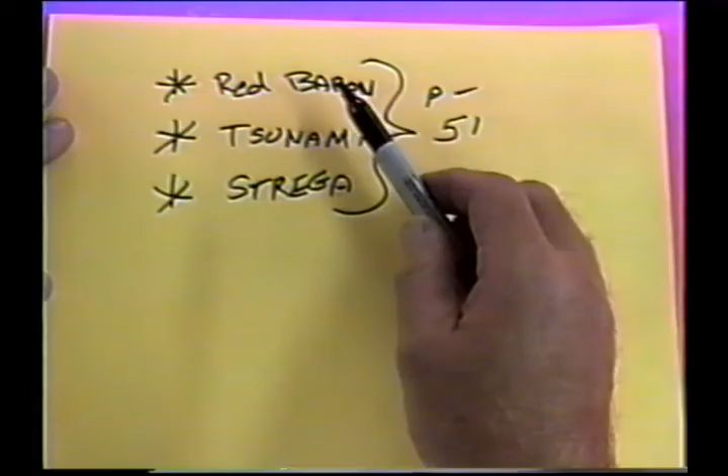All of these are in some way loosely based, very loosely in fact, on a P-51. That overall look of a P-51 is something that appeals to a lot of people. They've had various amounts of semi-scaleism. In the case of the Red Baron, it had the cuff in the wing, Tsunami had the scoops, Strega had basically just the paintwork. But from this whole group of airplanes now, we want to take this to the next level, and I want to go about this in a very methodical way.

Now, one of the things I want to try to do this year, and again, these plans change from second to second. The way this originally evolved, Joe and I together, Joe Adamisin, of course, had built the whole series of Spitfire planes, a total of 5 planes, each one a unique entity.

And what Joe originally started out with, we had started out with the idea in mind of making an almost semi-scale P-51, very similar to Al Rabe's planes, with dihedral, just roughly make this, and the large landing gear, the semi-scale, all the little things that go along with the semi-scale program.

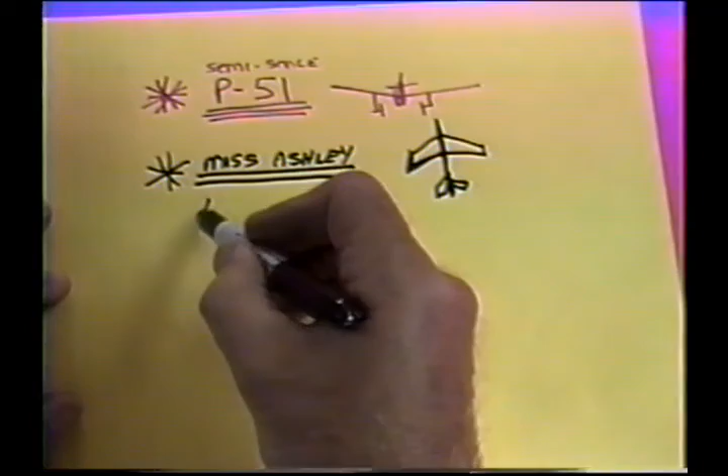Now that evolved into, from Joe doing research, because you'll hear this over and over on the video, Miss Ashley. Miss Ashley is a swept wing variant of the P-51. It's got a P-51 type body and Learjet wings. It's called a Lear Stang.

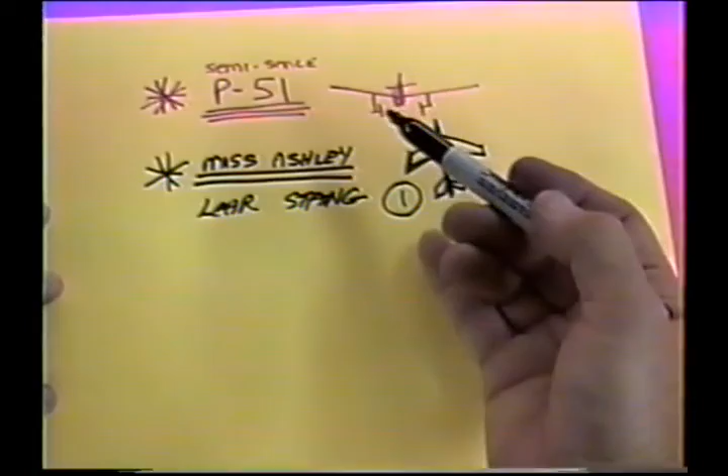It's a one-of-a-kind airplane. It's not a production airplane. Now, unfortunately, our plan had changed from the relatively scale P-51 to a Miss Ashley variant.

And I wasn't sure about a lot of things, the dihedral, the control systems, how we were going to, if we were going to use a tuned pipe on a P-51, it would be difficult if it was very scale, and would I be able to put it above the wing? There was a lot of question marks at the end of each one of our discussions.

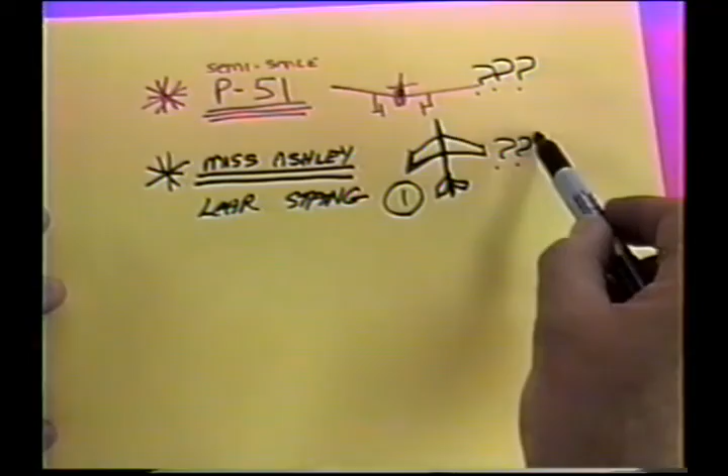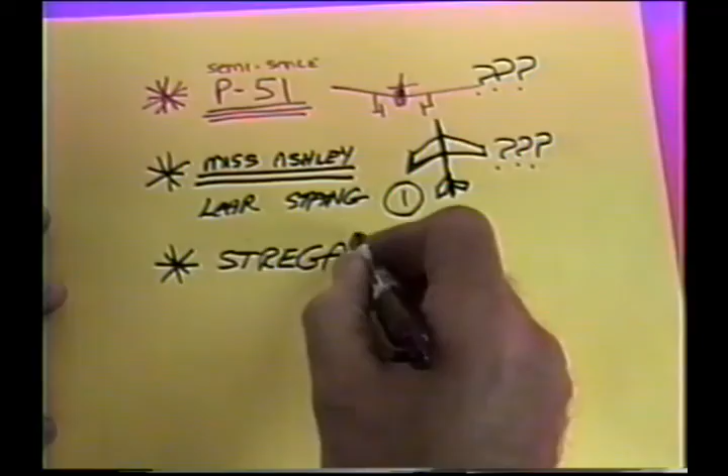And so this project sat in limbo a big part of the summer. And then what happened is, I had gone to the team trials with Strega. And I had been doing a lot of test flying with the GMA 50, GMA 60.

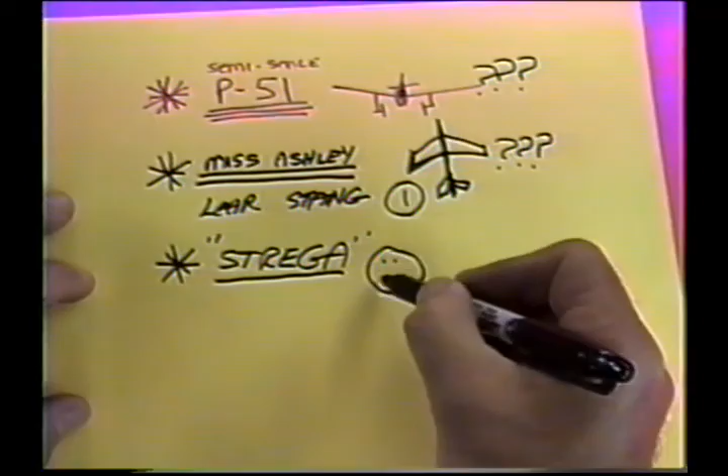And what I wanted to do is, at the end of the season, this plane was really getting tired. This poor Strega, I hate to even say it, he was really turning into a beat-up warhorse. And so what I decided to do is, at the end of the season, before I went into one of these very complex planes, what I wanted to do is make a replacement.

A plane that was basically similar to Strega, but had a little bit more of the P-51 flavor.

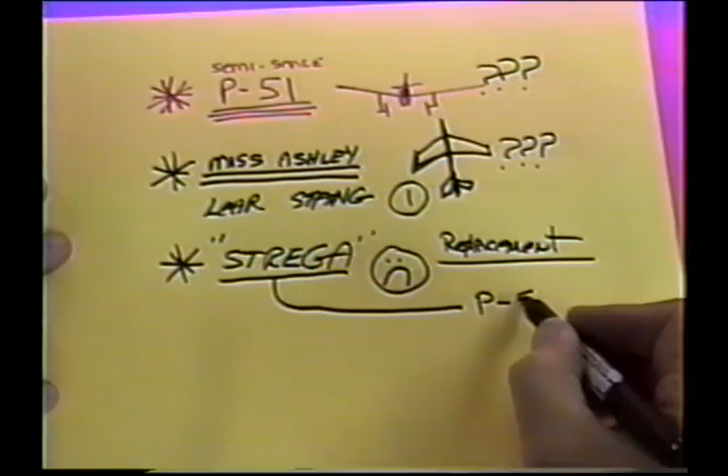Now at this time, Kent Tyser had come up with some really nice drawings. And see, we really have a lot of accessory items here that we can put in. I'm just going to rough this out.

On a more scale-like Strega, one of the things that, if it's a traditional stunt ship, and again, we're going to start out with this premise, we have a real nice canopy mold that Dan Banjock did the carving on, so we have that piece of the puzzle that we didn't have at the time we built Strega, if we decide to go in that direction.

We also have a lot of airfoil technology now that Joe has turned up, in contact with Al Rabe, doing some Rabe airfoils. We have a complete set of Rabe airfoils. So what I wanted to do this year is re-engineer the wing using a Rabe airfoil as my first order of business, and that's going to be the first part of this project.

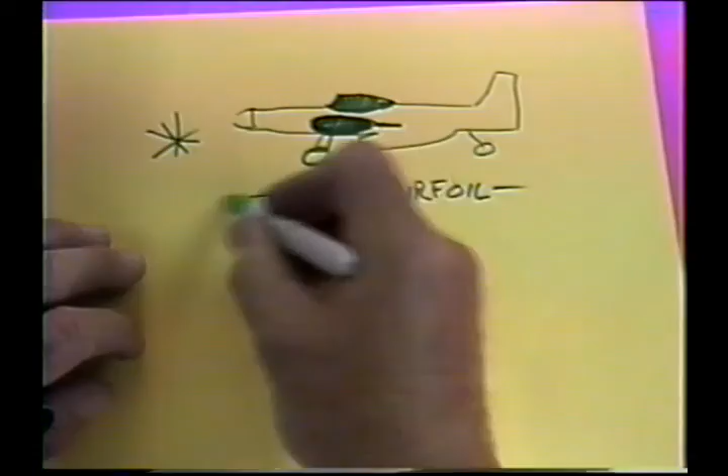Joe Adamisin did just an incredible amount of research into this. He had people at Boeing checking it out, a friend or two helping him with this. But basically the two big changes that this preliminary plane will have are the Rabe airfoil and the fact that we have other choices of canopies.

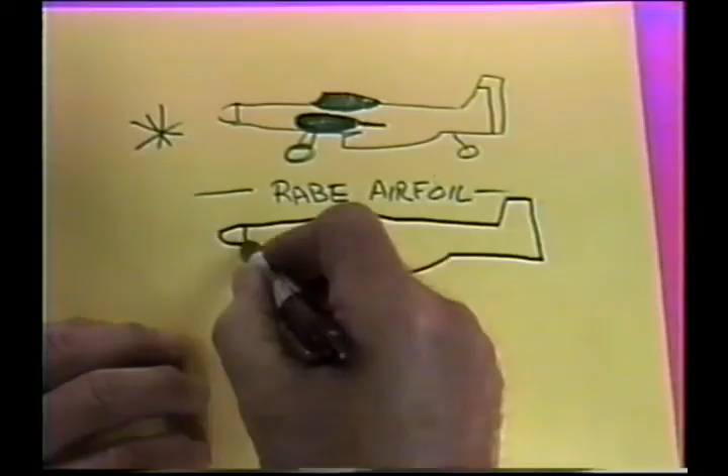Now, picture how this evolved. I wanted to make a carbon fiber body too. So rather than make two wings, one of the things I thought I could do is, if I make a replaceable wing similar to Paul Walker, or similar to seeing how successful Casminato's carbon wing was, it really got me going on this.

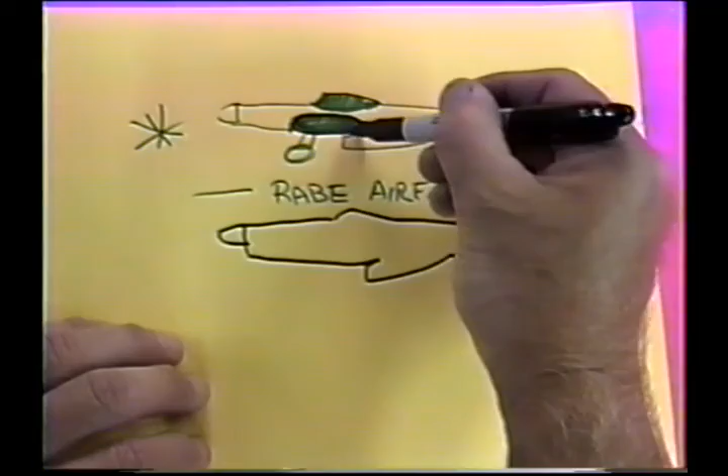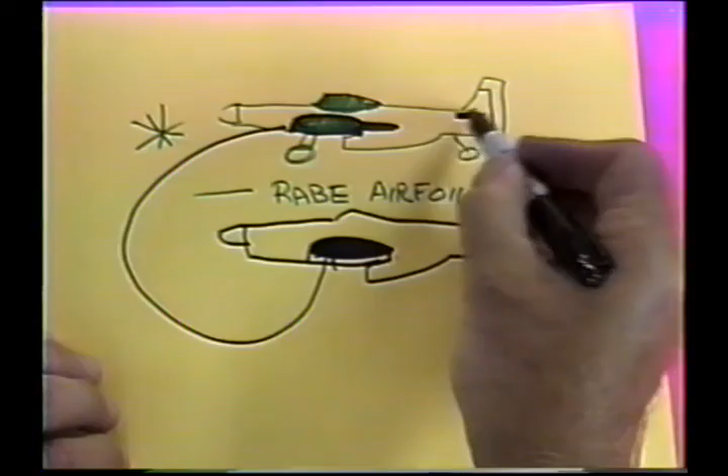If I made a replacement wing, I could possibly - and again the plans for this may change, but this is how we started off this project - we can build one wing, one tail possibly even, or maybe two. And by switching fuselages right at the field, we then can tell...

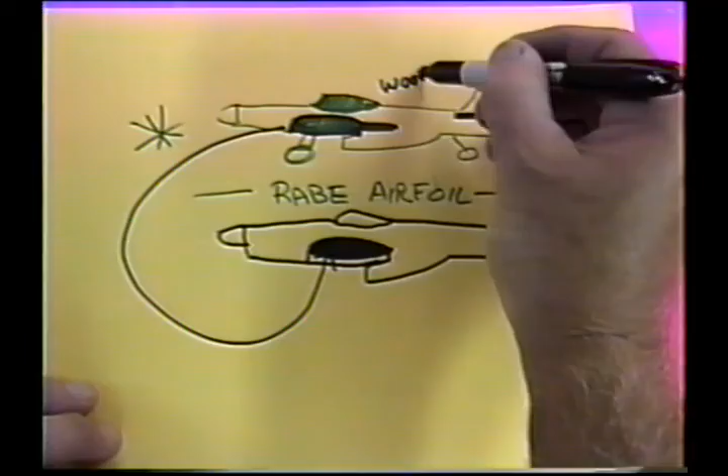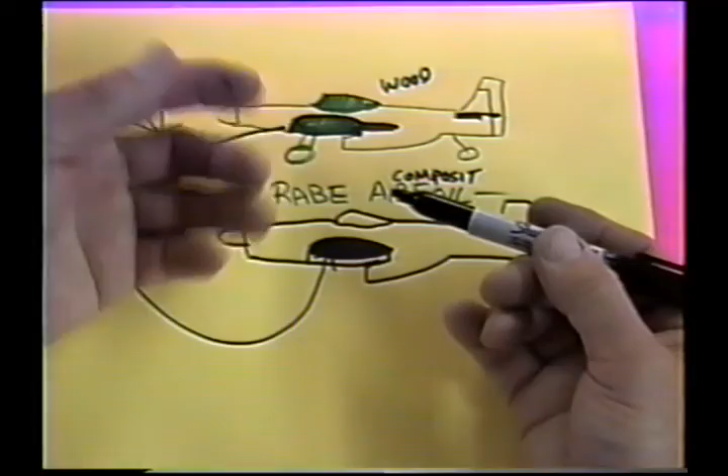Now the reason I think this would be a realistic way of doing it is, looking back at Strega, the reason I need a replacement - the wing and tail are still fine, but the body, the fuselage, the cowling is all deteriorated up here. Everywhere the pipe tunnel is, it's all deteriorated. The wood is so oil soaked you can't even put composite over the top of it. The body is cracked back here.

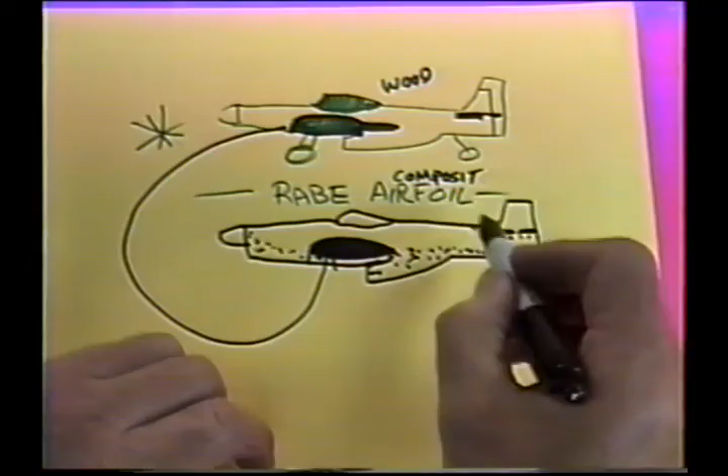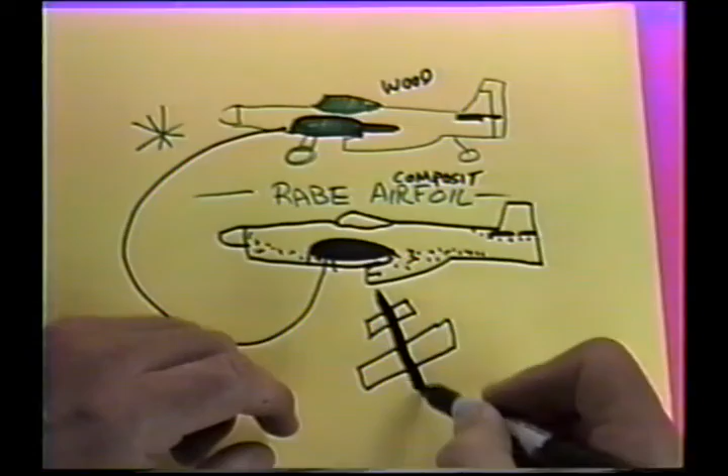It's basically what I'd like to be able to do is take the wing and the tail out of Strega and go mold up another body or build another body. And by the way, this is how I'm sure other people, like Paul Walker, people that make take-apart planes, do it - one of the advantages is when you go to build a new plane, you don't have to build a whole plane.

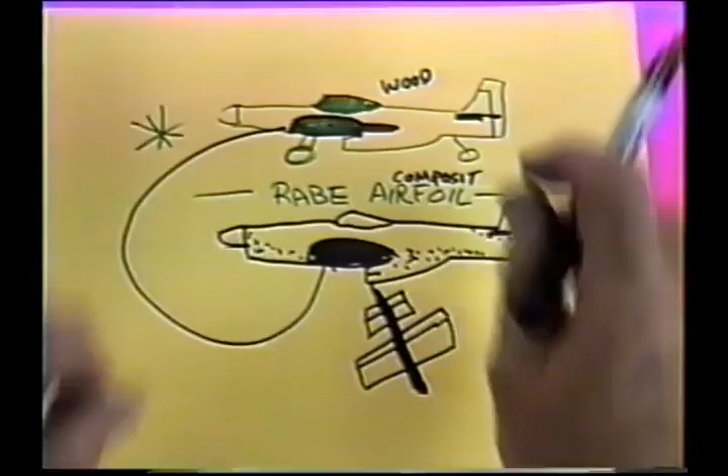So we're going to try to make part of this project - we're going to begin with the premise that hopefully we can make a replacement wing with a Rabe airfoil and two fuselage assemblies that'll fit the same plane. They'll have a P-51 flavor and be relatively - well, let's put it this way - straight wing, no dihedral, no real intricate paintwork. This will be our bread and butter plane.

But then once that original plane is completed, and it'll have two fuselages - once this part of the project is completed, assuming (and I'm getting a little carried away here, but you have to be a little carried away to do this kind of research work) that the carbon fiber body is not in some way undoable - and I cannot picture right now that it's undoable, it just may be very expensive and very time consuming - then I feel that this opens the door.

You got to picture this. This opens the door to the final project, and I would assume this is going to be sometime after Christmas, that if we arrive at this, doing a relatively full-scale Mustang type of fuselage with kind of an Al-Rabe dihedral deal.

Now, this is a real important part of why I think this is a good choice. Let me go through this before we actually start cutting wood. On a standard stunt ship, what happens is the body, even the body sides, and you include the top block - what happens when you make the cutaway for the wing, here's what really happens.

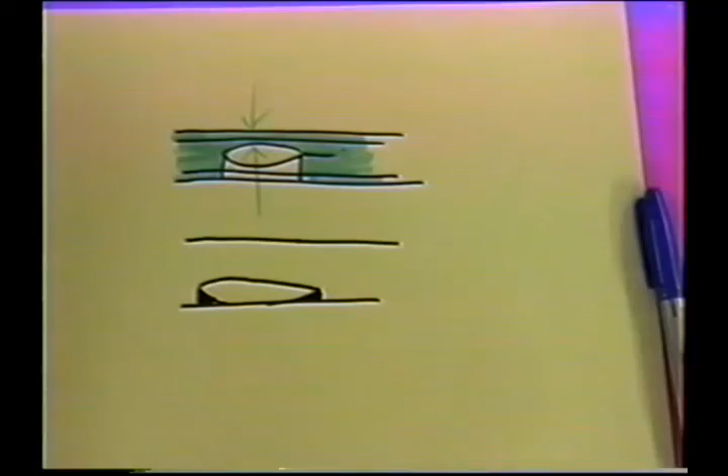On a relatively scale Mustang, what's different? The wing is sticking out the bottom of the body, so you only have to deal with this little piece here. Now look at the difference - the total amount of structure, and of course the canopy - but you have all this structure in a low-mounted plane, a low-wing plane.

So if the carbon works out for us in the very beginning, this would have a dihedral angle in it. And by the way, we're hoping Al Rabe is going to join us, at least in spirit, on this project with some of his expertise and inventive ability.

But what happens is you have a much thicker part that makes a take-apart plane more practical. Now, if the carbon fiber fuselage works out well, then this can be a mold, and I will spend an extreme amount of time and energy to make this the best possible mold it can be for a full semi-scale ship with dihedral, the large landing gear, a molded carbon fiber body, maybe make our own four-bladed props. Again, more coming up on that. But it's going to be step by step, and the reason I spent this couple of minutes to explain this is the logic so far of what we're trying to do.

A reason is engines. Years ago, engines were less powerful. But the other thing is they had more inherent vibration. Now, modern engines, the whole slew of them, you can pick any one you want, run at a relatively higher RPM, have less vibration, and make more power.

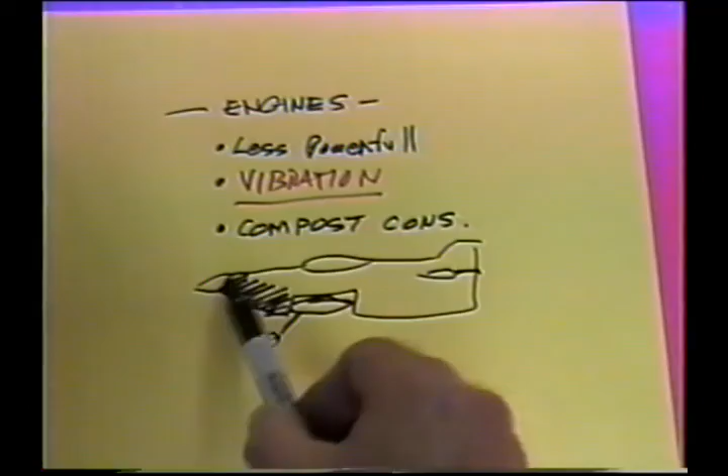So one of the possibilities I'm hoping is with the composite construction, I might ultimately, and of course this can all change, be able to supply a shell where a person, all they would have to do is build a wing and a tail. In its worst case, this whole part could already be molded in one piece or in halves.

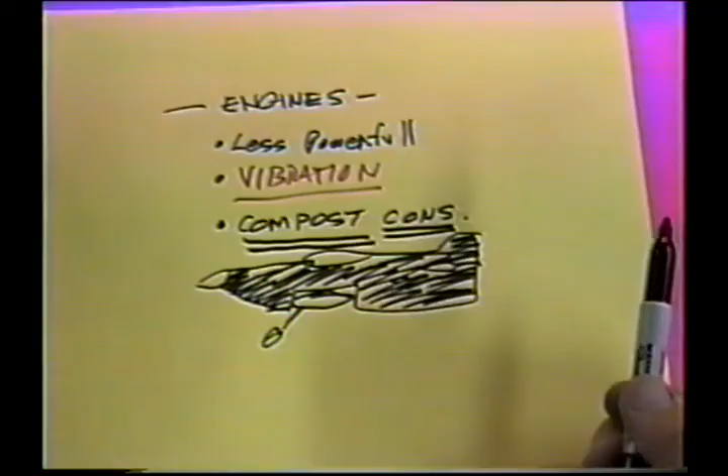And what it would allow us to do is, let's say Joe Adamisin wants to build the same plane, we can make him a fuselage and mold it up in a relatively short time. Let's say Al Rabe wants to make one of these, or let's say anybody does. Gerald Champ has shown an interest in this project. Gerald Champ sent me that P-51 that's almost completely built except for the wing, and we could use that as a basis or a plug for making the actual mold.

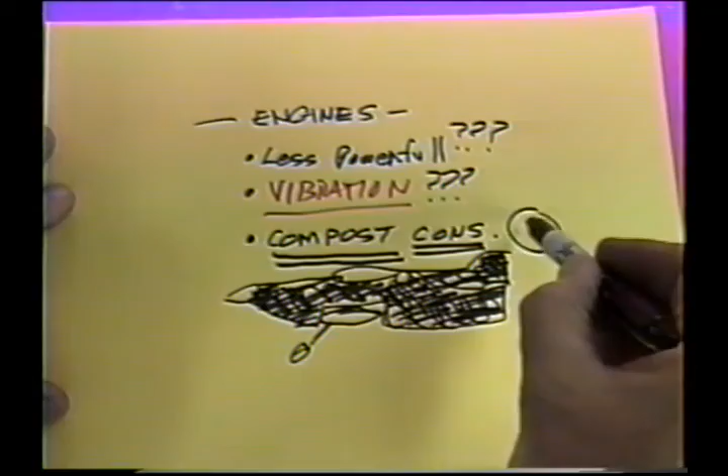But one of the things that makes this possible, years ago I don't know if the vibration and power levels would have lended themselves to composite construction. But given the fact that we've got so much time on Strega with the Jett, and the PA is relatively similar in vibration and power output, it gives me a lot of confidence that this can evolve into a very interesting winter of building.

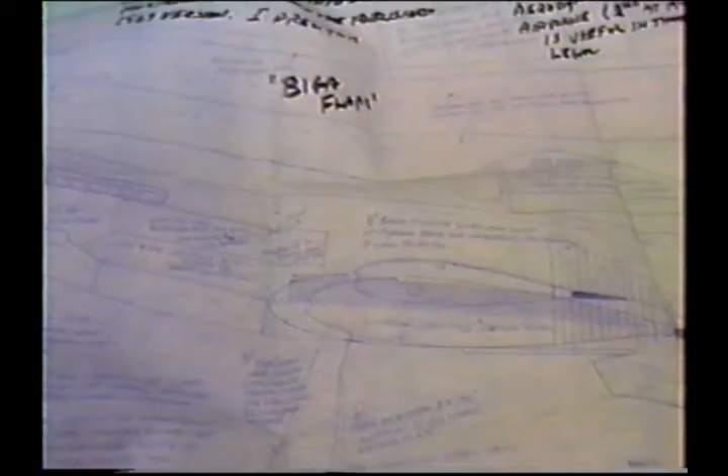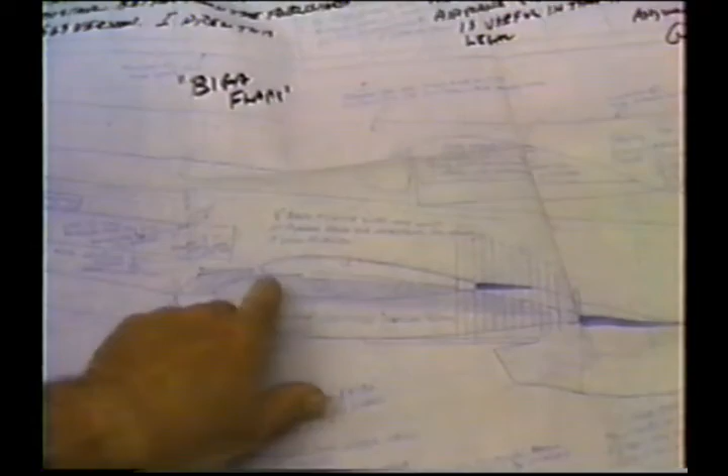Anyway, as always, the first part of this - these are Al Rabe's original plans. First part of anything, since we're going to be making a straight line plane, we need to get - and Joe Adamisin has already sent them here - enlarged versions of this, 8.5 and 11 inches, so we can lay out our straight line wing using Al Rabe's original airfoil and flap shapes.

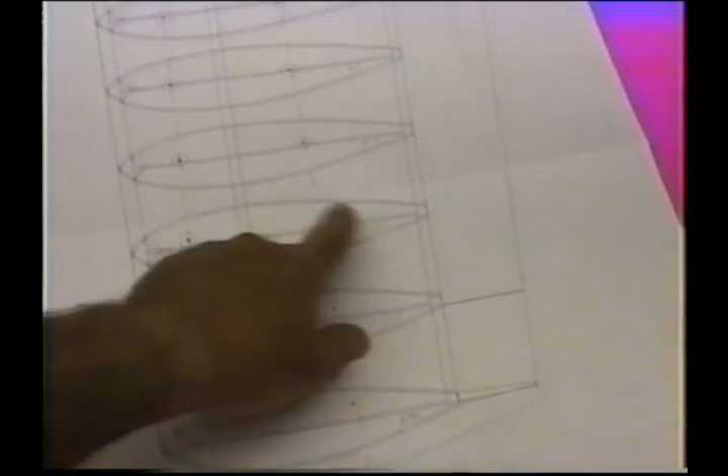Of course, Joe's got this laid out in complete scale. This is for the dihedral wing. We're going to be making a straight line wing, but we're going to use this. You can see how much different this is, say, than a Paul Walker or a Cardinal or an SV11. It's a radically, in my book anyway, radically different airfoil.

Right from the very beginning of this tape, I'm going to make all new templates. I'll be more than happy to loan those templates to anybody, but we're going to try to use those same templates over and over again for as many people as are going to be joining us in this project.

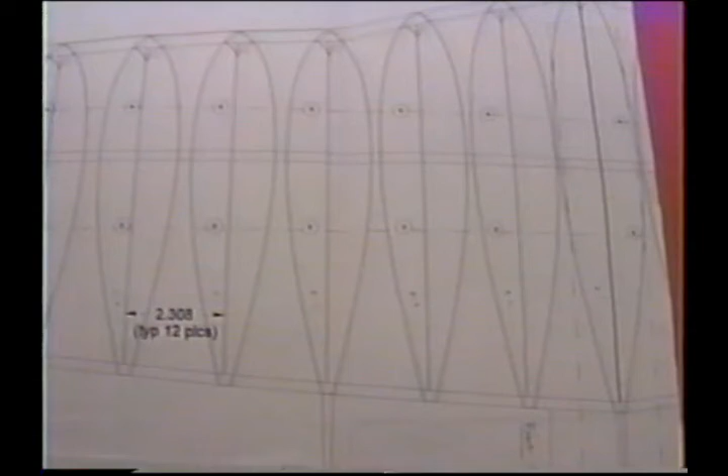Now we're going to begin the actual construction of the first plane of this season with making up the wing ribs. Off camera, about a week ago, we had an afternoon where we weren't too busy, and I wound up starting making the templates. That's on tape 176, but I didn't get very far because various other things were happening around here. But I want to continue and pick up from this point on.

We wound up just roughing out the first half of the templates, and I have to pick it up from this point on. If you're going to go back and follow this whole thing, you need tape 176 also, but we're going to start with the templates, pick it up from this point, and start cutting. We may even get a set of ribs cut today, I don't know.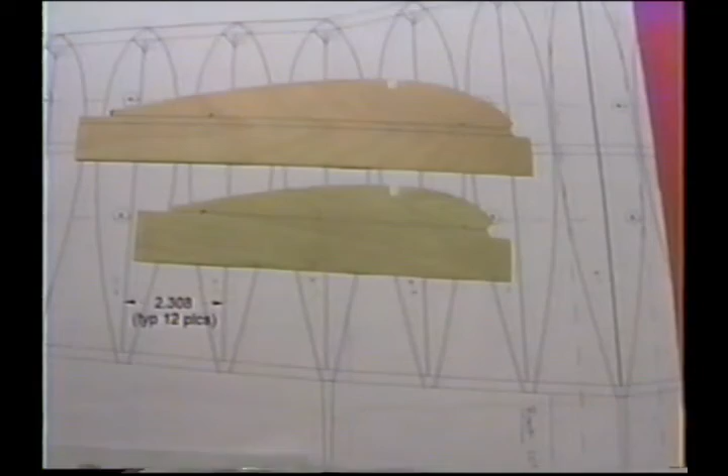I want to give you an idea of the change we're actually making to the airfoil. Not very significant, but it's an amount worth taking into account. So if you're building along with us, you're going to want a set of the new ribs, the new templates, and the new plans. For right now, what we want to do is finish the work needed to get these templates ready to carve a set of ribs, and we may get that done in this session.

This is a way that's been developed, I think, by Joe Adamusco. We've cut up some pieces of threaded rod, and we made a little tool off camera on tape 176 for making up the notches. If you've never made a set of ribs for an original plane of your own design, or anything really, this would be an interesting exercise for you.

For our original set of ribs, I'm not going to be too fussy about the wood quality. I'm just going to go to the rack and pick out some pieces of wood, sandwich in 15 pieces of wood here, rough cut them out, because that original set is going to be strictly a set of templates. In other words, the original set we're making, we're not going to use as a set of ribs. We're just going to use it as a set of templates for tracing out the ribs.

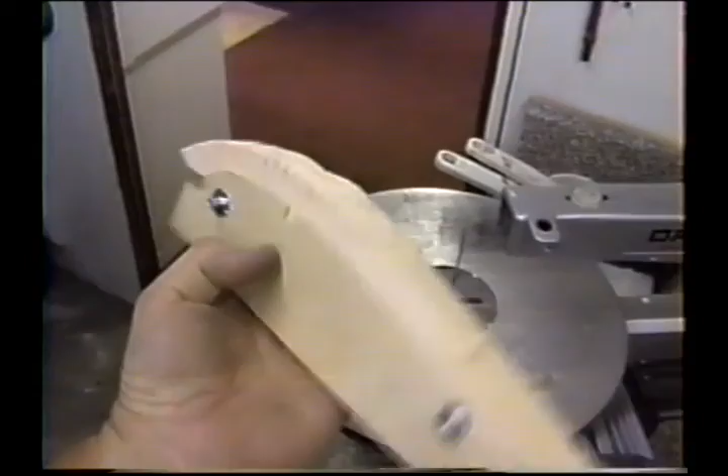Okay, today I guess we'll finish carving the ribs. That's one thing we can do.

Well, what happens, and I guess it happens to all modelers, is you get into these gaps where at some points in the year I have gaps of 3, 4 hours at the end of the day to work, or gaps in the morning, the afternoon, or whatever. Right now I have small gaps, so I always try to plan one step at a time rather than trying to plan a giant project, or laying out something, or making some decision.

I try to each day plan one small little project. Now if I can finish doing all the carving and sanding and truing up of the ribs today, that'll be a nice thing. I can trace these out on a piece of mylar, that'll be another nice little step. There's several nice little steps instead of trying to take a big chunk and then you're kind of frustrated at the end of the day when you don't finish it. So today if we can finish these, that'll be one nice step in the bank here.

These came out pretty nice, by the way. Pretty good. Now looking at this, basically I just want to repeat what I did yesterday, do it in small amounts.

Again, it's real frustrating to me because obviously what I'd like to do is just work to midnight every night on this stuff, but what generally happens is I have to work in small chunks of time. If you plan out one job at a time, usually you can say, well, at least I got that accomplished today, now it's one step out of the way, or whatever. Anyway, that looks like how this is all panning out.

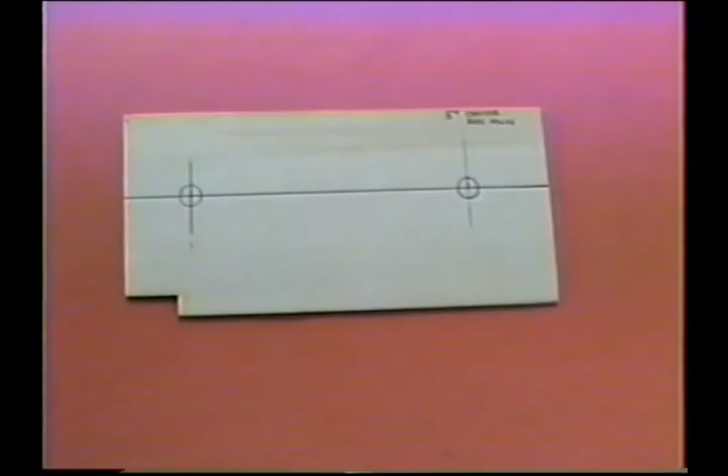I just want to drill it just a couple of thousandths thinner so I can get a real nice press fit on there when I push the tubing in.

I'm trying to make up a base plate, just ordinary 16th balsa, where this will confine the rib. When I shove the rib in, that'll keep my center line. I can then line up the center line, and my template will be glued.

I'm going to put some 1/16 braces on here to space it up. I'll be able to slide the rib in, and then it'll already have the holes in place, and cut it with a brass tube. So just making up a little fixture like this should hopefully be a good way to do this, and something that when somebody wants to borrow the ribs and the templates, this will already be in the little kit for them to use.

I took a piece of 3/8 tubing, sharpened it of course on the belt sander, put a little edge on it. Another trick for getting nice clean holes here is run a blade along the inside. Now keep in mind, this is a razor blade.

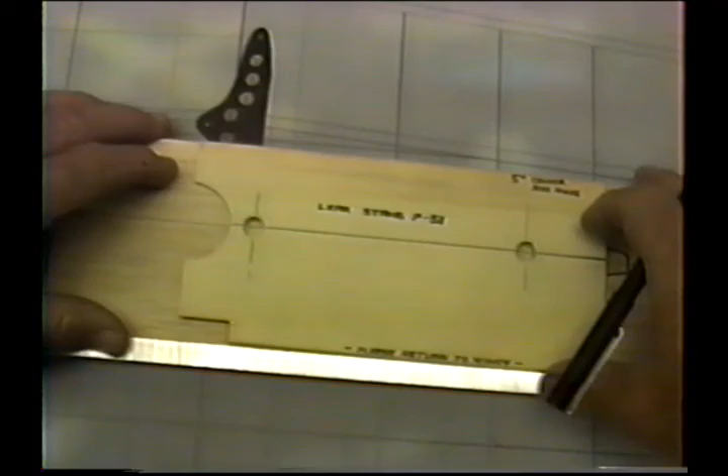Now yesterday what happened is, in the middle of working on these templates, I got interrupted with some customers here in the shop. What I need to do is, on these aluminum bars, I need to lay out two new holes. I was thinking I could possibly use one of these, but they're up kind of high. I want to lay these out and see if I have any real chance of getting them into two new holes. It's not really going to be possible. So instead what I'll do is I'll turn the bars upside down.

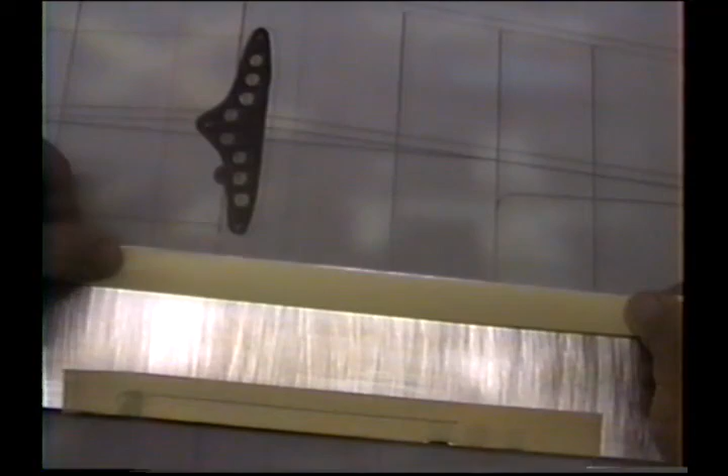The only reason I put the tape on there is I don't have any bluing. Bluing is a material like paint, like nail polish, that you put on aluminum so you can put accurate scratches. But we have it all down the shop, and obviously none of it's up here.

Well, what I want to do is get a relatively accurate set of holes. Again, I always use the little pens, I don't know if I've shown this before, these really fine point Pilot razor point pens that seem to work well for this. Same way I put center lines on. This is a good way to get your center lines figured out, and you can see it leaves a nice fine line on there.

What I'm looking for is that the two holes are 5 inches apart and parallel from the top of what will be the base of the jig. Just trying to get an accurate gauge here, because I want to have the back piece flat from the trailing edge. Obviously these pieces are oversized, but that doesn't really matter. This will just give me a rough.

Just a little double check that I'm not off by any amount. We'll go over to the drill press and drill these out. The way to make sure that the two holes are the same in both pieces of aluminum is I've clamped them together, laid them flat on the table, made sure this edge is parallel, and I'm going to spot, just put a small drill right on center, and then check it with my ruler and with my template to make sure I have this right on center before I go and drill out the big hole.

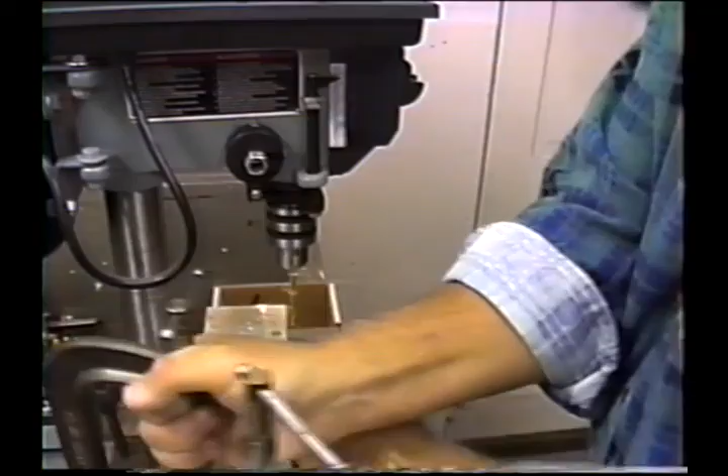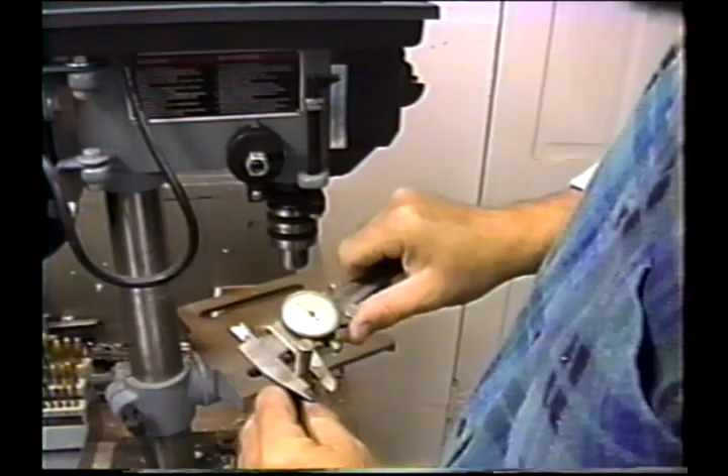It's good to have a nice set of drills. By the way, a set of these drills, I've seen these on sale for under $50 locally - usually they're about $70, $80. Having a whole set of number and letter drills is a good idea if you're doing any kind of serious modeling. Anyway, get one exactly the size of the rod plus about 2 thousandths. This way we'll hopefully get a real nice fit on the rods. What I'd like is to be able to press the rods in, but I don't want them slopping around and flopping around - I'd like it to just be a nice press fit on the rods.

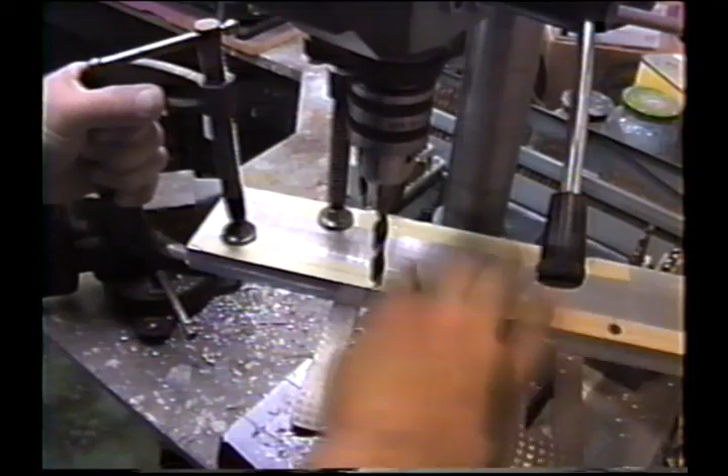By the way, another thing I've learned many times - if you're even new to drilling this kind of heavy material with big drills, if you're in doubt, you could always take an extra clamp and clamp this to the table. In this case, you can see I'm holding it with my hand. Never go on a piece like this and hold it with your fingertips, especially when you're drilling this thick of a material, as it tends to go through and it'll definitely bite.

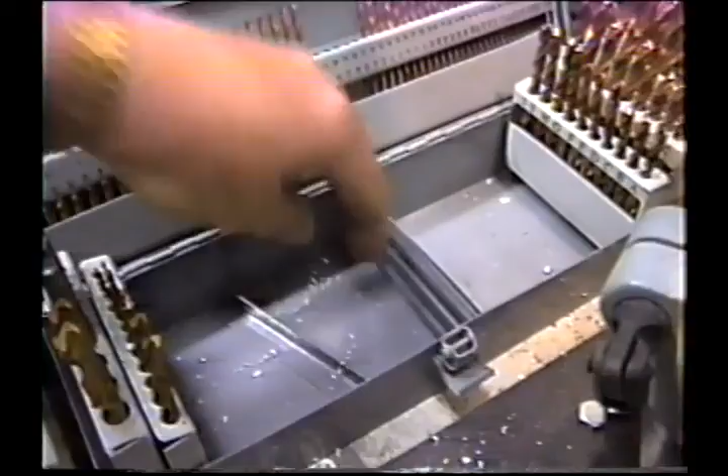A set of these drills is really a good investment. I'm always of the opinion - here's what happens when you wind up with a drill box full of drills, and every time you need to go find a drill, it's a pain in the neck. If you have a nice set like this, you tend to keep them all in order, and I keep the ones upside down that I use all the time so I don't have to go back and forth miking them.

Alright, we got the plates drilled out. I like to take an oversized drill and just cut that edge - I don't want to have a razor edge there. And I'll take these over to the sanding table. I just don't want to have an edge that I'm going to wind up cutting my fingers on, or that when I loan these out to people - and these guys have been all over the country already when we were using the original rods. It's typical good machine shop practice to break that edge anyway. You don't really even need a fancy tool, you just need a drill that's a little bit bigger.

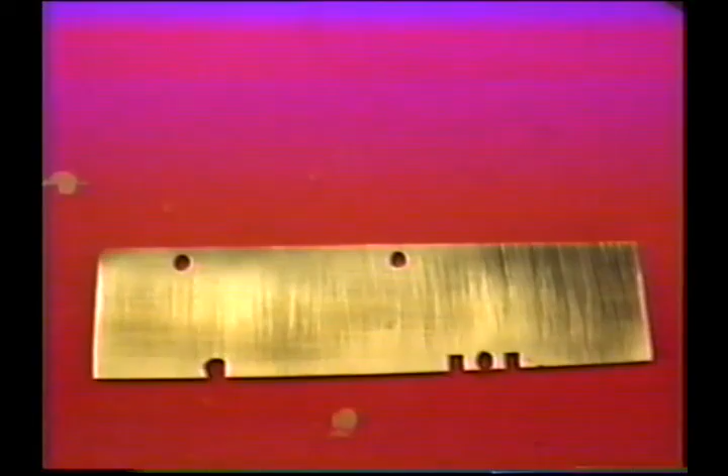See, I want a nice tight fit, but I don't want to have to force this in. That looks just about like what I'm looking for, right about there. I just want to check that I've got the holes that I'm looking for, and I want to make sure the dimension to the trailing edge is usable. That's good. Now obviously once you have a set of these, if you change the spacing, you can move up - you can use the same thing over and over again. You don't need to go buy a new piece of aluminum each time, and in our case, we try to make things as flexible as possible. You also want to be absolutely sure that they're one right on top of the other, that they're perfect.

Okay, just a few thoughts here. At this point in any construction job, we have some ways to build wings. There's a lot of ways, and in the past we've probably documented most, if not all of these. Let's go right through them. I'm sure everybody who started building at some point in time built in your lap - I remember years ago building Nobler wings, one right after another. And a lot of times those wings, well, at least mine were anyway - building in your lap, there was always a certain amount of ambroid pins, and your lap really almost never resulted in a perfectly straight wing.

Now in my case, years went by, and what I did - and I was so happy when I did this - I went out and got a door.

I used to take a piece of Homosote on top of the door, and that really wasn't that great. You'd put pins and ambroid in it. That was another method - I don't know, maybe the wings were a little bit better, maybe they weren't. Always hard to tell.

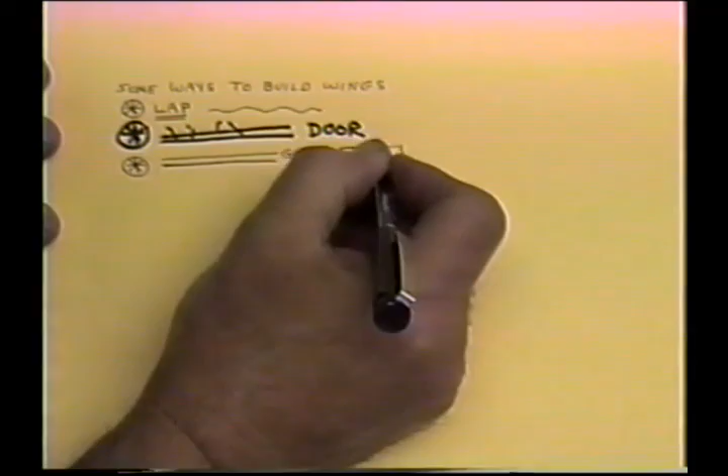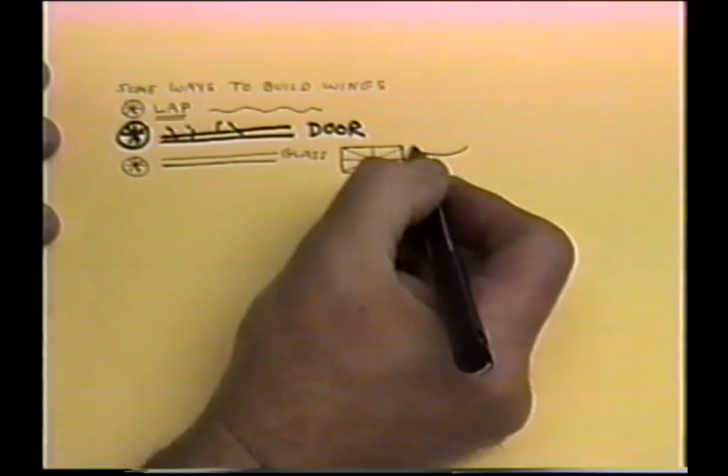That seemed to work a whole lot better, especially if the glass was reasonable. What I would do is shim the glass - I've done this on video many times - by taking a string and going corner to corner, basically checking these dimensions. If, for instance, the surface is like this, and you stretch a string, you'll notice there's a gap. You have to shim the middle, and usually thin glass is relatively flexible.

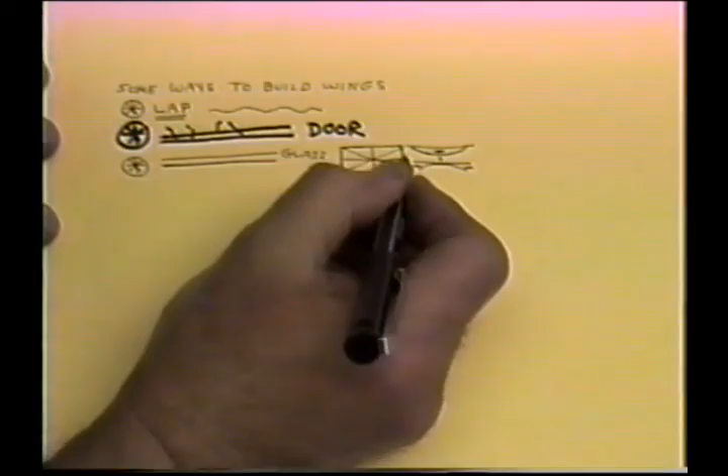The other thing - if the glass is like this, and there's a piece under the string, well, a string is always going to be perfectly flat unless you have a 6 or 8 foot ruler. But by checking these dimensions, you can pretty much get it flat - I used to shim with IBM cards and whatever. The whole objective here is you need to get a flat building surface.

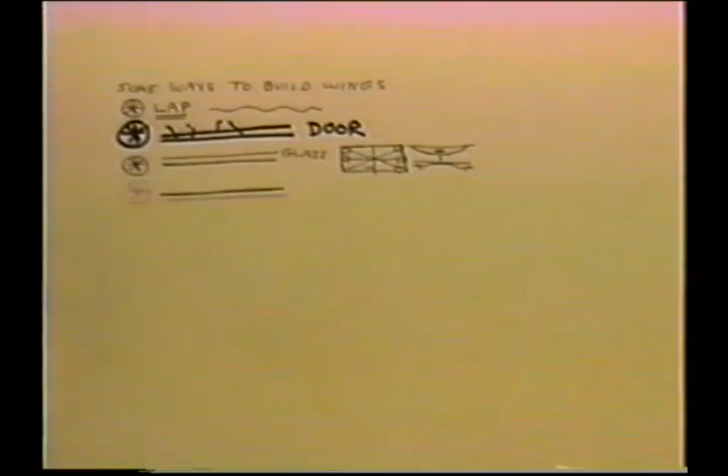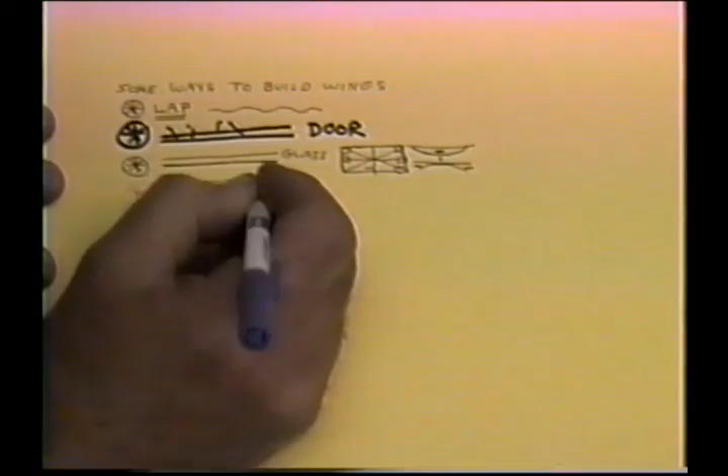This year we're one step ahead, we hope. What we have is a table that's relatively flat. On top of the table we have a piece of half inch glass that's shimmed relatively flat. And on top of that - again, something we're doing for the first time - we have a piece of marble that Mike Kajeski got at a tombstone place, and I'm not sure he paid for it. He says he found it, but I don't know. There's probably a name on the other side of it.

So we have kind of a sandwich. But the objective, again, is to have a surface - and I don't know how much truer than solid marble - is to have a true surface.

Now it doesn't matter how you do it. If you had unlimited money, if your father was Donald Trump, you could get a granite machinist plate, which would probably be a couple thousand dollars. Well, most of us are not that rich - in fact, I'm not, for sure. But anyway, the objective is always to build on a flat surface, because that's your reference point.

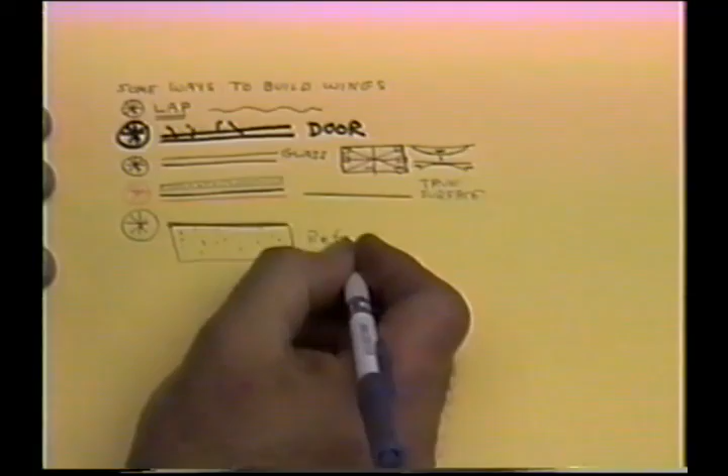Now this is only step one. Step one is to establish, no matter how you do it - and these are just some of the ways - the objective is to establish a perfectly flat building surface, and it doesn't matter how you do it. You can use a butcher block table, or any number of ways. It just turns out, because I'm trying to videotape various ways of doing it, we've already videotaped this way and some of the other ways, but this is one of the ways.

If you can establish - I'm hoping this marble piece is going to be real successful - or if you can have a table that's perfectly flat, anything that's perfectly flat is going to work well.

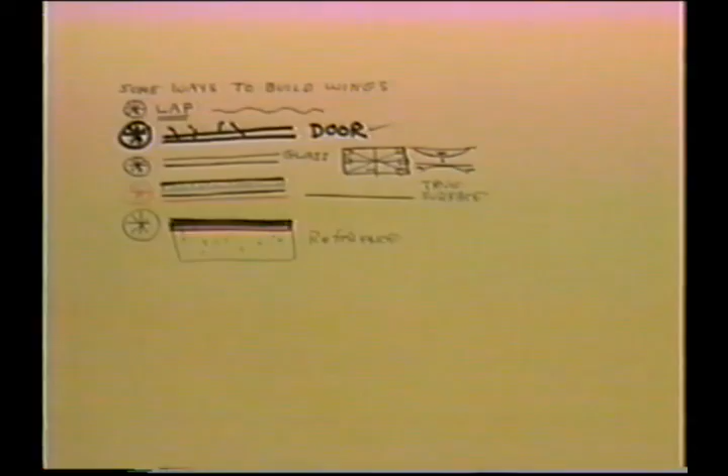And once you have a flat, true surface - it doesn't matter if you check it with straight edges, laser lights, Home Depot sells a little laser light thing that's kind of cool - don't need to make this real exciting. A piece of dental floss is all you need to check level.

Once you have it, then you have a decision to make here - the ways to build, and there are several. Once you have that surface, one of the choices, and I'd say an excellent one, is the lost foam method that Bob Hunt has evolved, whereby you take a foam core, put it on a flat table.

And build a wing with geodetic or straight ribs. That's certainly an excellent way to build a wing. This would be foam - we built a wing similar to that. Tsunami was built in a similar way using a foam core, a foam cradle.

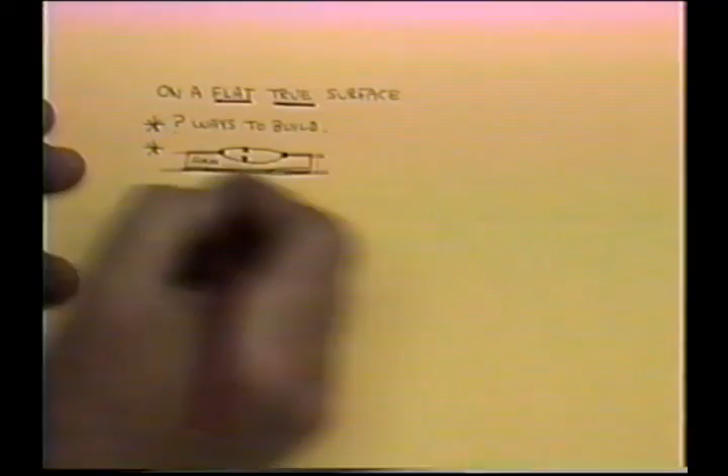But notice what we're trying to establish, and it doesn't matter how you establish it, is that this surface is always going to be equal. We're building a parallel wing with the center line of the wing parallel to the table.

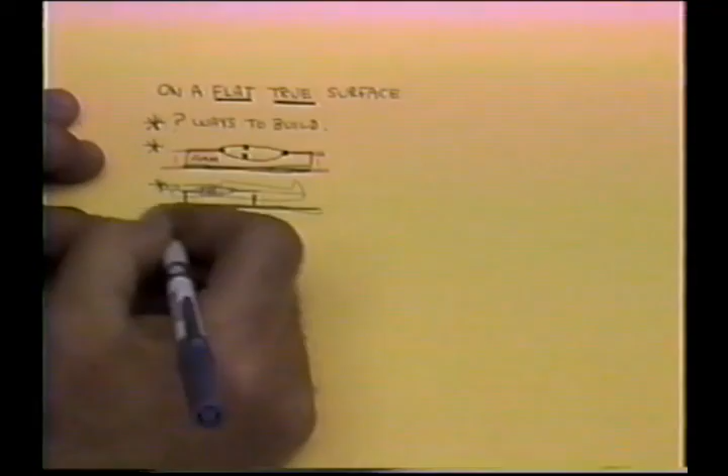Another way, and years ago this was the way for how many Aries and Cobras I built. You would put a center line on the fuselage itself and build off the beam of the wing, but you'd always be referencing down to this flat table. You had to have a flat table to realistically make a straight I-beam wing, and then you could lay in your ribs.

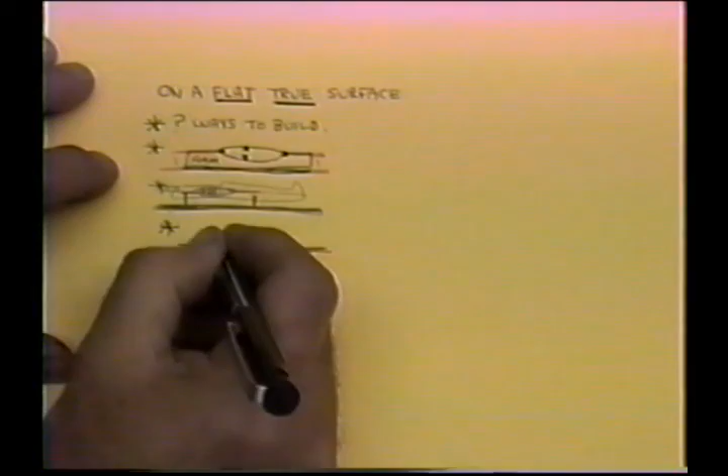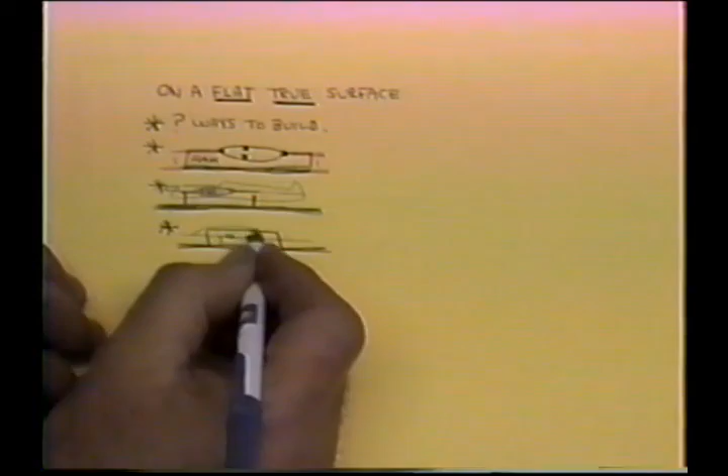But you'd always have this flat table, and the flatter the table is, obviously the truer the wing is. We've done this many times, and Joe Adamusco is a big proponent, and I've videotaped the different wings we've made using the plates we just made that hold two rods. The objective is that the center line of the two rods becomes the center line of the wing, often an imaginary plane, and by sliding the ribs on here we can always measure this dimension down to here.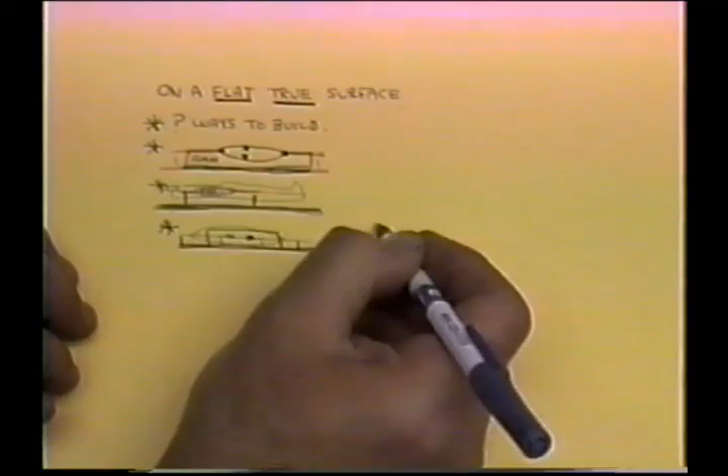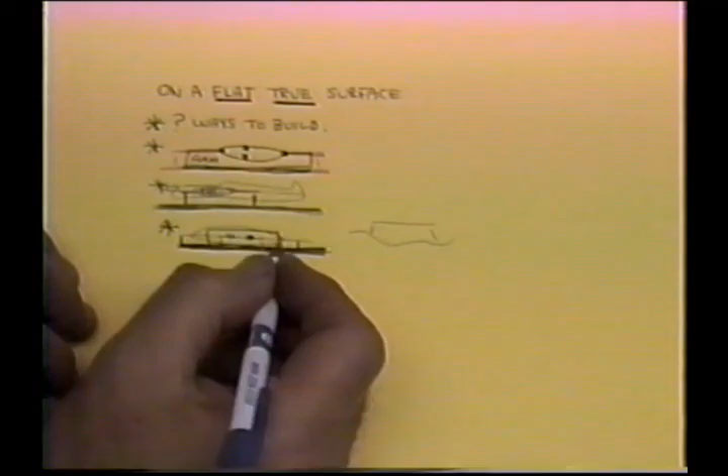But you're never going to have it if the table is crooked. Well then what good is measuring down? You've got to establish this, and I wouldn't say you need to do it in thousandths of an inch with a micrometer, but certainly within a 1/16 of an inch would be reasonable to build that wing.

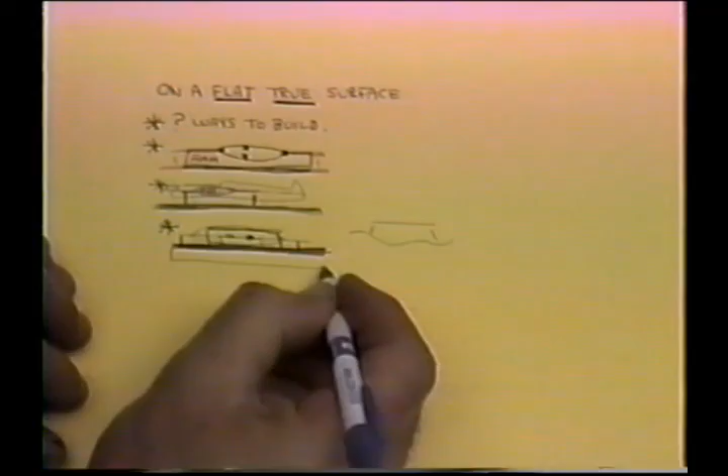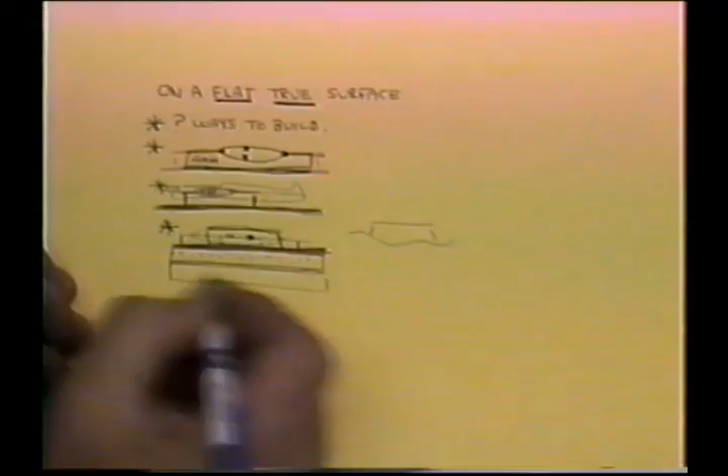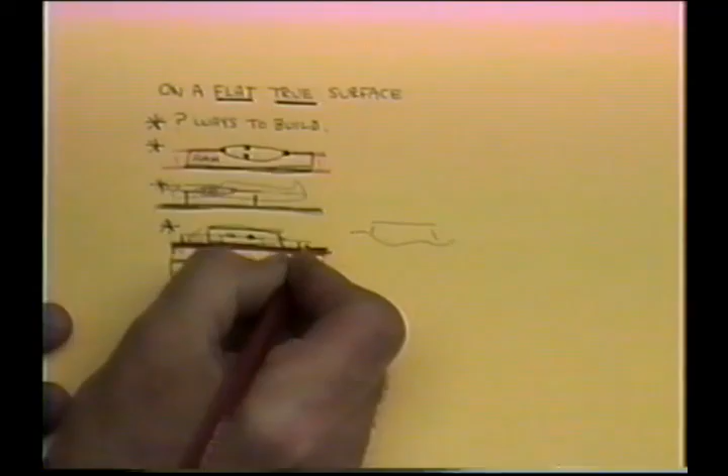Now, this is the method we're going to use, and we're going to use Mike's Tombstone, which has a real flat plate on top of a piece of glass, which is true, on top of a solid mahogany table, which is true. All of these things combined, I hope the net result is that this surface is going to be perfectly true. And also it's going to allow me to constantly reference up off the table and get this exactly true.

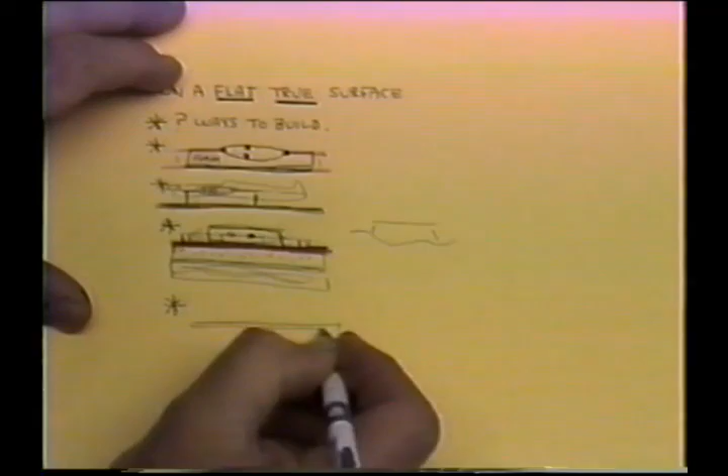I don't want to leave old Tom Morris out of this. His method, a variation he calls the Lincoln log method, is certainly a good method, and I've been excited about trying it. It's just that this time through, we're going to use the tried and true method, because what we're looking to do this winter is build two separate airplanes, or two fuselages for the same plane. But again, the Lincoln log method is doing all any method is doing.

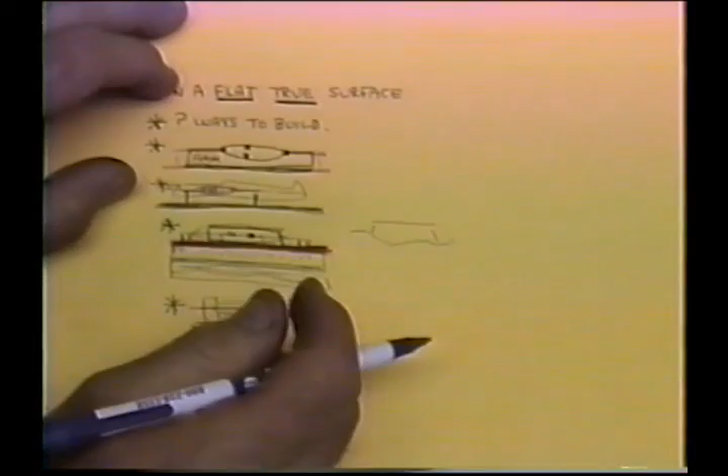And by the way, the box method, which is on video too, is another good way. It's simply to glue two pieces of 3-inch wood with a center line on them around the perimeter of the wing plan, and then lay your ribs in with the center line. In effect, you box in the wing, put a center line on all sides, and then drop the ribs in.

Well, this is kind of a cool way to do it, and we've done it on video already. In fact, we've done all of these, and Bob Hunt has an excellent video using his method. We have the Spitfire done this way. We have a Strega, I believe, and how many other planes, how many Spitfires Joe has done.

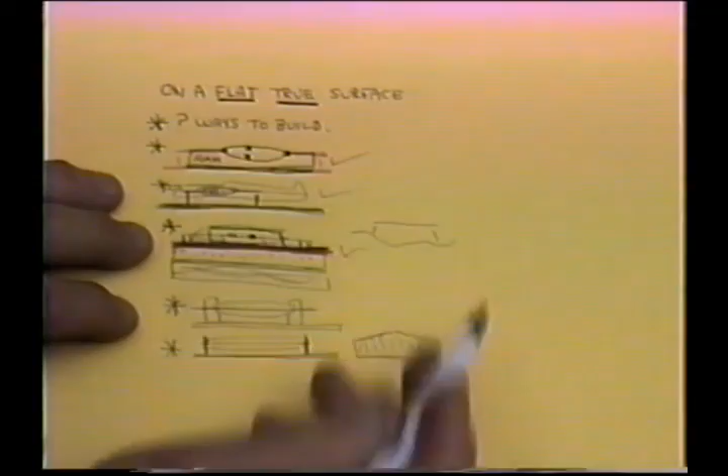But maybe next year we'll use Tom Morris's method. Again, by having all these choices, what it gives you is a choice of what's the most convenient way for you to build a straight wing. And these are just some of the decisions we've had to go through before we're actually going to lay out the plans and the jig and lay out this wing.

I always try to remind people, when you're making a selection of how you want to build a wing, it's not a contest. It's not like you get points for finding the most complicated, difficult way to build a wing. You pick a way that suits you. If you have an inclination to build I-beam planes with all the ribs, like the I-beam Spitfire or an Aries...

And I believe Bob Hunt has a video on building the I-beam wings the Billy Werwage way, yep. Well, why not check them all out? Why not try each method once and see which way you like the best? Some people are just going to point blank like foam wings. That's the easiest way they can get a plane in the air.

Hey, nothing wrong with foam wings. Some people like geo wings. Certainly a lot of people have come to build some really pretty planes with the geo wing. That's kind of cool. And certainly you can't discount the good old-fashioned traditional rod method where the rods hold the ribs in place.

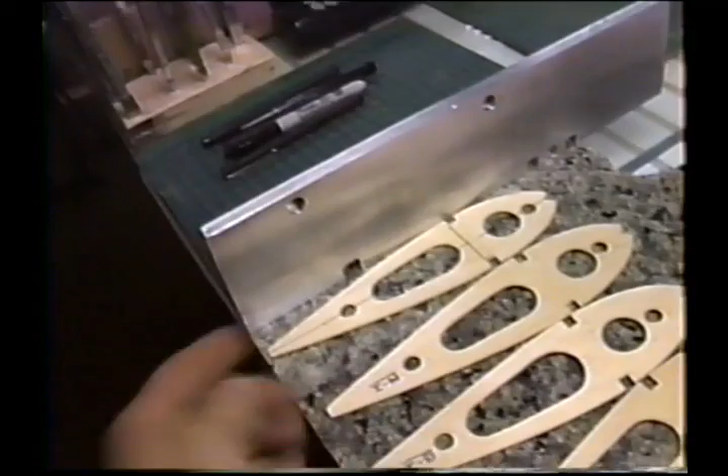Now the next step is to line up, and you can see what I've done when I drilled the new holes. I drilled them so we'd have one flat reference point here for our trailing edge, because I want to glue the trailing edge right down to the table, and I want to have the rods as an additional way of holding that wing perfectly straight during the whole construction process.

It's hard to believe. If you lay out the wing to where these parts have to be, one of the things you find out is right down at the other end, I mean, Mike, come on. We just made it. We didn't make it by a whole lot either.

Anyway, the next thing I need to do is plot out. I want to get all of the lines. Actually, I'm not going to use the plan. I want to put the lines right down on the marble. I want to see what kind of ink. Maybe I have some indelible ink or some paint or something I can paint those lines on. That's the next thing I want to do.

Okay, I'm referencing off the hinge line so that I have the hinge line parallel for the whole piece, and then of course I'll use the tri-square to just lay out all the ribs in the exact location. The center one is 2.5, which is what we use so the center ribs go right under the fuselage, and the other ribs, traditionally a 2-inch rib spacing is what people use.

Now I had wanted to get this whole jig set up on the end of this tape, but believe me, it's not going to happen. We're near the end of this tape, and I want to make sure I'm referencing right off the hinge line, and it's very accurate. But it looks like we're going to be finishing this on the next tape. So, almost like Flash Gordon, huh?